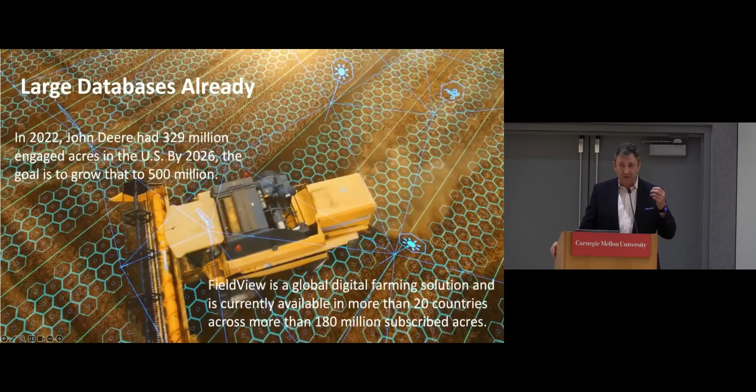So about data, why is this important? It's because data is not only important to actually develop trusted technology in terms of automation, but also because the data is going to be critical for your business case. It doesn't help to suggest that you can save some labor or apply fertilizers in a little bit better way if you don't have the data to back it up.

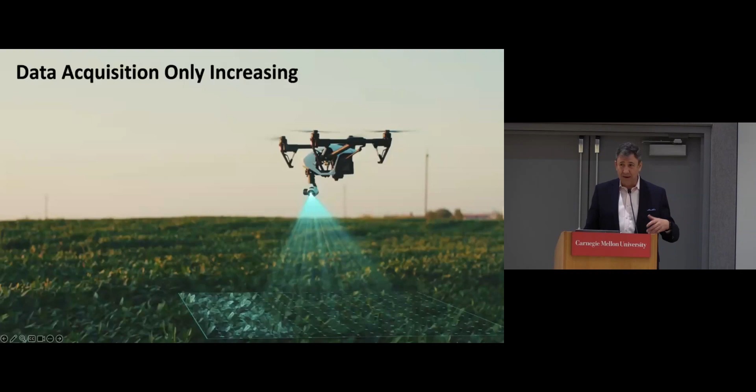So this is something that has been happening for the last 20 years, and the amount of area and data quality is very, very good to make the business case and also to run statistical models to understand how you can improve agricultural operations. And this data gathering is just increasing in terms of speed.

So that brings us to how farming and agriculture is managed. Same with mining, same with construction. It's not anymore based on only a few people who are knowledgeable. More and more it's managed by systems that analyze the data and with an industrial factory mentality are always working on continuous improvement and driving more productivity, more safety, more quality, and of course cost reduction.

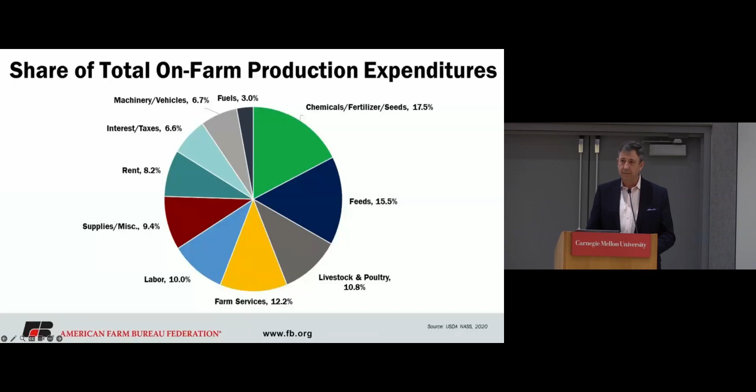So for example, when we look into what's the money that goes into a farm, and this is a very generic pie chart, you're going to see that labor is about 10%. So labor displacement is not really the main business for automation in agriculture. It's really about reducing the inputs, reducing the fertilizers, the seed input, the chemicals. And bringing robotics into agriculture is really about understanding that it's a production system.

Same as in a factory. So for that, understanding what are the stages and where automation makes the most business sense is critical.

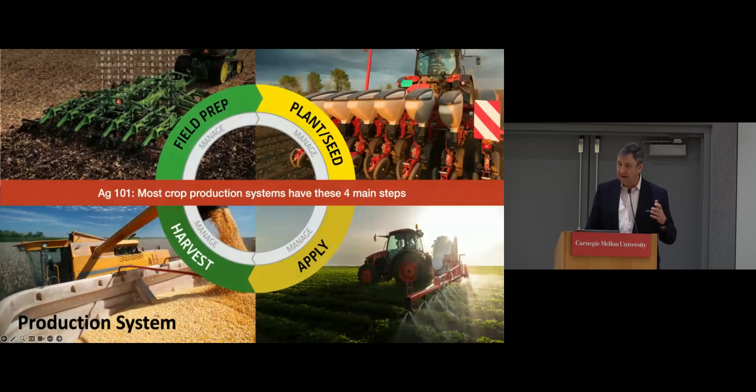So for example, here we have a tractor that is plowing, autonomous tractor. That's great, but that is just table stakes, the entry point. And John, thank you for this slide, I told you ahead that I was going to steal it.

Many a times, those of us working in the functionality focused on that orange step, which is the actual plowing. But a farmer needs to set up, plan, maybe he's planning from the previous year, setting all of the resources, adjusting things, integrating things, bringing the stuff to the field, and then at the end of the job there's also a number of tasks.

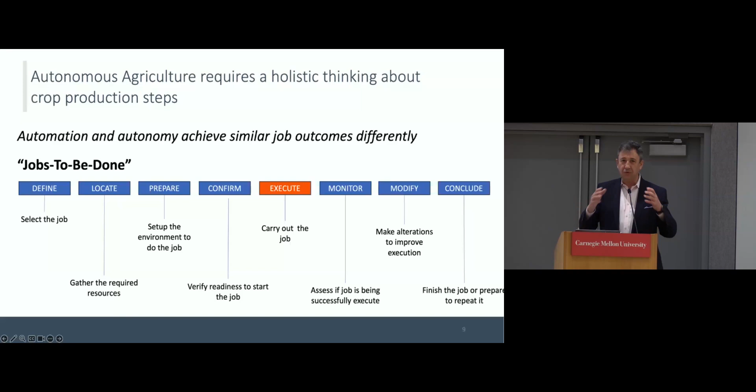So whoever is able to actually automate in the context of all of these tasks will drive the adoption. Also, going from A to B is not really the business case. The business case has to do with the job, and in the case of agriculture, it's an agronomic job.

A tractor by itself does nothing, and a robot by itself does nothing. But if you have the smart implements that are going to drive the actual activity and the engagement with the ground or the planting or the harvesting, that's where you create value.

And furthermore, when you think of the life cycle of the customer, you have the sales part, and there's a lot of effort into creating a product that customers would buy, but the customers will make the money using that technology over multiple seasons. And that goes back to the business case.

Because at the end of the day, when someone buys a tractor or an automated vehicle to do some job, the only thing that they have gotten when they buy it is a hole in their checking account for the amount of money they paid. They haven't gotten any value yet. Hopefully over multiple seasons, that value is going to come.

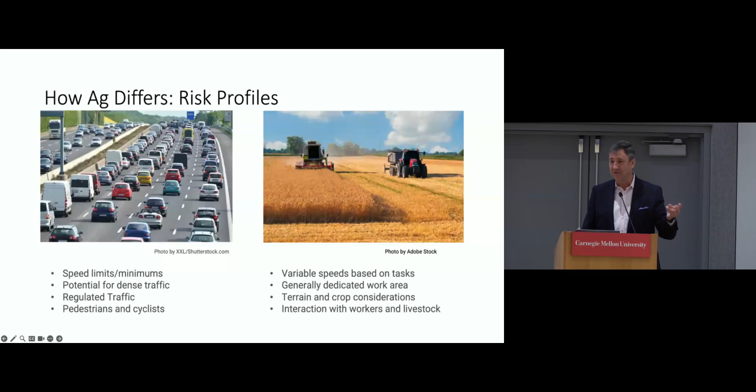But at the same time, crops are different, the weather is different, fields are different, and the globe is very, very diverse in agricultural operations. So there's another side of complexity.

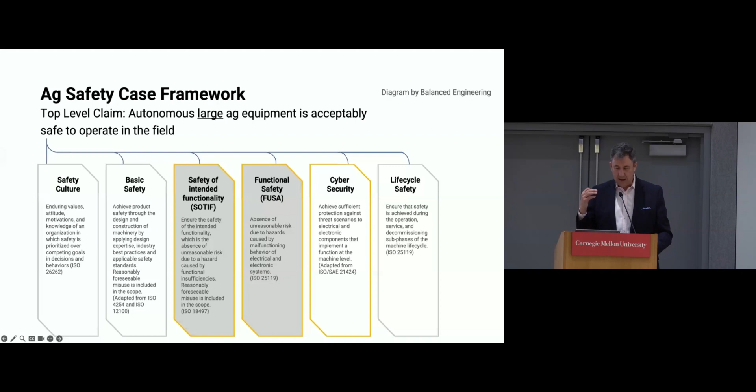You talk about SOTIF and functional safety. So some of us are putting a lot of effort and money to create dedicated safety cases for agricultural automation. I'm not going to go into the details, but of course some of this is inspired in automotive, but adapted correctly to agriculture.

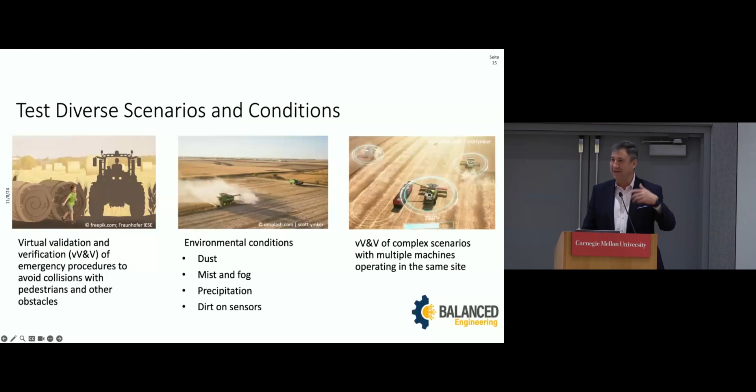Finally, the topic of simulation is key, and for some of us, getting to the level of fidelity of outdoor automation is really important to test all of these technologies. So I'm going to thank everyone who is working on simulation for DoD, because to some extent it's outdoor, it's all-terrain, and that works for agriculture and construction.

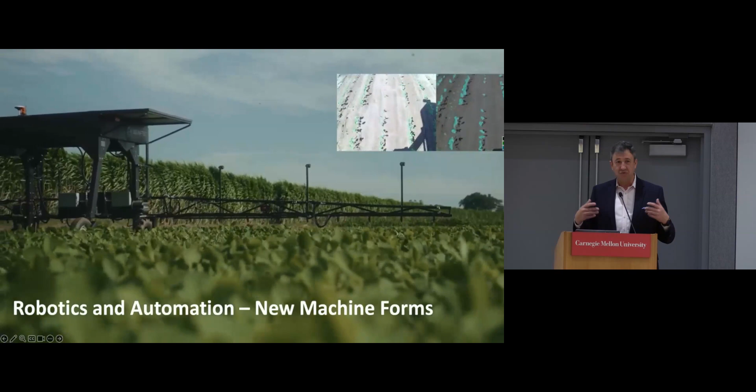Finally, this is just getting some new machine forms. It's not just about tractors being automated or sprayers being automated or trucks being automated. Also, it's about, well, what if we have a solar-powered robot that can run every day without any maintenance, without any tendering, without any fueling?

So this is one example of technology that is being deployed commercially by the hundreds in Canada, the US, and Brazil. With that, I'm going to stop talking because the most interesting part comes with John Reid, and then after that, Red.

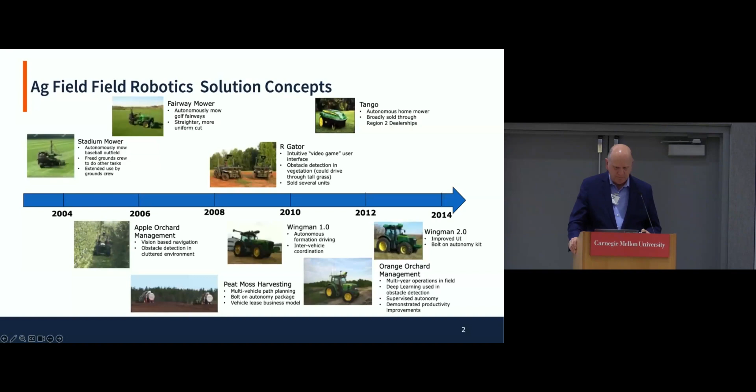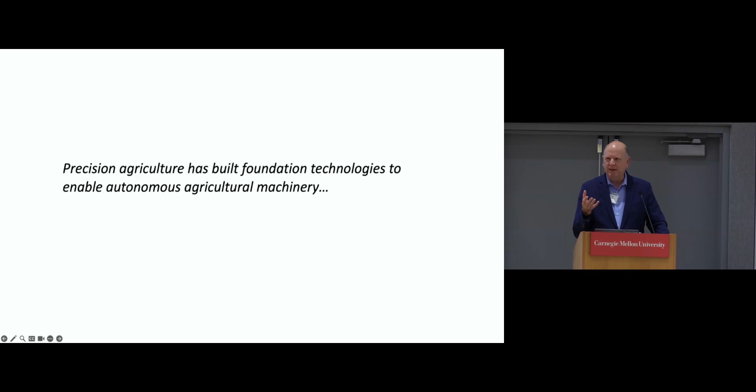What I really like about the application of field robotics to agriculture is that it actually has applications in precision agriculture too, and in fact benefits from a lot of the things that have happened in precision agriculture. With GPS technology, it creates a platform that enabled a lot of incremental steps to take place that lead to a wave of autonomy that's starting to happen in the industry today.

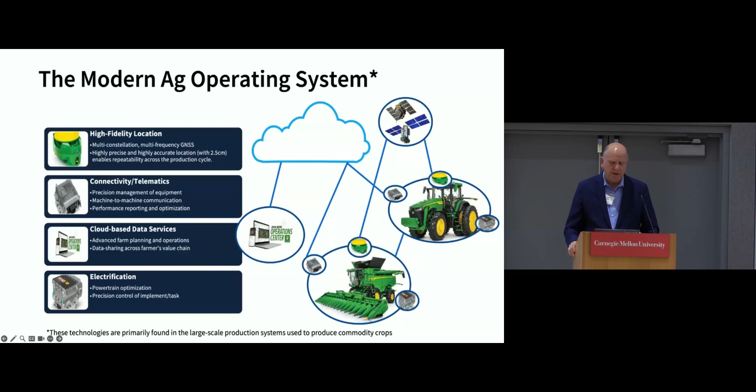You look back and think how far we've moved from the 90s, where you had to customize everything in order to do steering or brakes or anything. A lot of that is automation now. You have software-defined machines today. In the platforms we work with at the high end of the industry, we have high-fidelity location, connectivity and telematics, cloud-based data services, and electrification giving the ability to actuate parts of the machine. You probably never see battery electric, but having electrification for actuation really is an enabler for a lot of the automation taking place.

AI has actually moved into these systems as well all along this journey. My PhD work in the 80s was vision guidance using a PDP-11 strapped to the top of a tractor, with a very low pixel count - I think we just had 4-bit gray level pixels - essentially used for guiding a tractor down row crops. That's commercialized and on the market today.

Also, things like path planning and controlling the mission, even when an operator is on board, are available - not fully autonomous, but it really has enabled productivity, being able to reduce the skill level of labor required.

Automation and autonomy and AI is augmenting human performance as well, and this is an NREC product that Deere has on the market. It basically allows machines to work in close proximity while you're managing the fill. You can just see the stress go out of the operator's face when he's driving the combine and working, not focusing on whether he's going to run into the machine system adjacent to him.

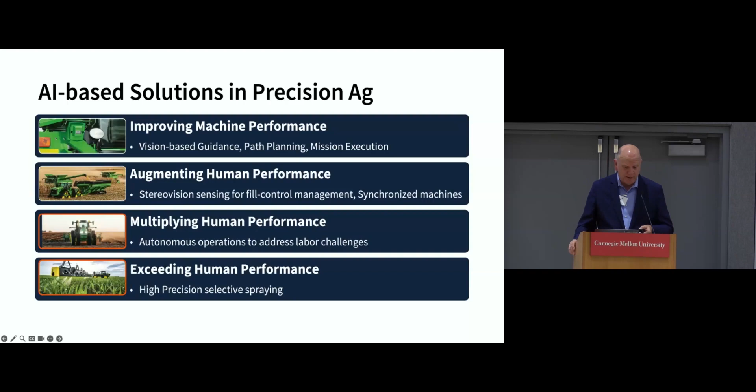We're starting to see a wave of companies trying to get the multiplication effect of human performance through autonomy, and I'll spend a little more time talking about that. I think it's really interesting to see See and Spray, which is precision spraying that reduces chemical use, but humans can't do that job on the implement. It's opened the door to levels of automation that still engage the operator on the machine, but help the machine do things humans can't do at the speed the machine is doing it - all providing value for the farmers.

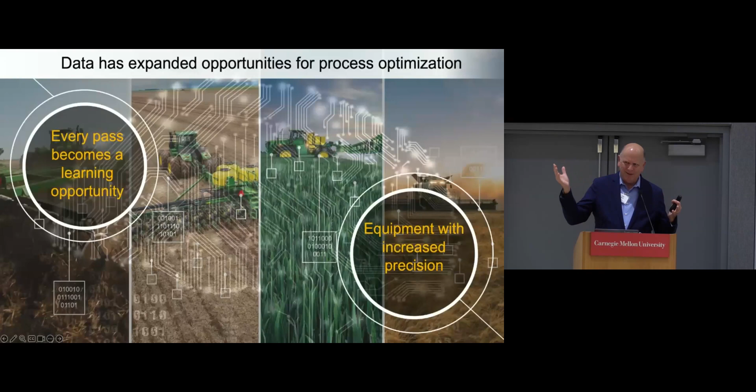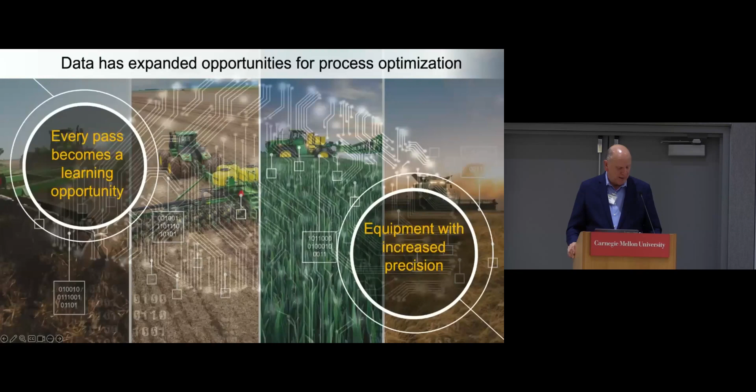Several people have mentioned this data side, and the journey we went on started with GPS, and data came in the last decade, being able to really leverage it. Data is the fuel that's driving a lot of this automation, because if we can measure it, we can see opportunities to make things better, and the data also can be used to take complexity out of the robotic systems. I think it's actually opened the door for field robotics to expand even further.

So here's an example of where the possible future state can go, because we sit here wanting to do robotics, and in our mind it's well, when will everything be roboticized in agriculture? Actually, I think there's going to be this mixed pathway along the journey.

One pathway is keeping the human in the loop, but the machine is getting more and more intelligent, with robotics capabilities integrated into the machine beyond the driving, even assisted driving. But the human is there to deal with the fact that there's a lot of uncertainty in agriculture, and safety in particular is a complicated task for all the different conditions around the world.

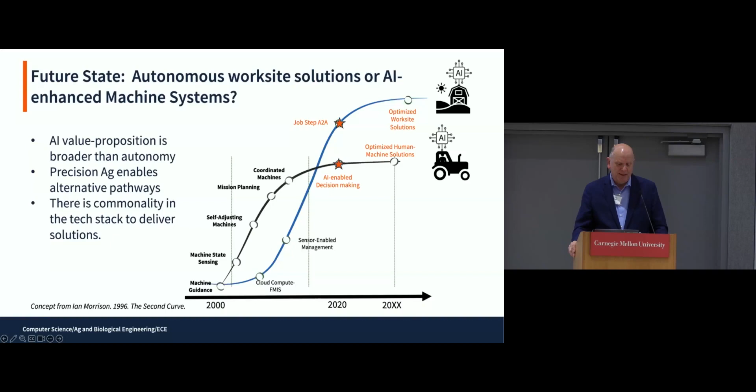But there's this other pathway that's thinking about the farming system and creating the job outcomes at the work site level. In this type of world, the autonomy is enabling solutions that can be more fully automated. Thinking in that work site context, there's a lot of job steps to be done too. I really believe both of these are playing out in production agriculture, and there's a lot of commonality between the technologies on both sides of this.

The other thing with the tech stack coming from precision agriculture is that it's also opened the door for transformation beyond this human-driven machine side that's been the predominant model in agriculture. When we think about this, we're all kind of taking existing vehicles, sometimes retrofitting them, like big tractors, to make them autonomous.

But with all of this tech stack in place today, there's no reason why the machine form has to stay the same. In fact, it may be an opportunity to leverage these novel machine forms, like Alex just showed in the slide, that can achieve the job. It's lower cost, maybe lighter, can operate day and night, and all of those types of benefits.

Especially, in our mind, we have to get beyond the part of the business model where the farmer is going to want to run these machines. Actually, the service models that were talked about earlier would apply to agriculture as well, and could open the door to really an acceleration of this transformation.

In fact, I think that helps deal with the complexity of the dealership Alex talked about. The dealer also has to have new skills to manage these machines, to keep them up to date. So actually a service-based organization has more of an opportunity to deal with those challenges.

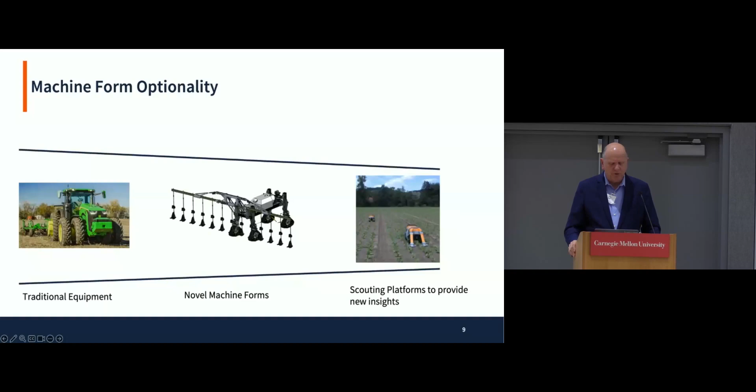I think it's, though, not the solution for large-scale production agriculture and field robotics. It might work for greenhouses and things like that where you have a more limited environment.

So others have talked earlier about the challenges with perception, and it's always been kind of the big gap for agriculture — lots of times trying to just take off-the-shelf technologies and leverage and use them. But over time, there's been technologies that have emerged that help do some things.

Active fill control was the perception sensor using stereo that's monitoring the wagon and trying to understand how to position it relative to a combine so it can fill. And then actually more recently, situational awareness types of applications.

These first two are kind of like doing a function and not really so much robotics, but taking those technologies and putting enough of these sensors around a tractor so that you can actually have an awareness of the environment so that it can be operated autonomously — that's doable today, and it actually combines the needs for autonomy with an ability to provide value, because these sensors also are telling the farmer something about the crop and the materials flowing into the machine that they can use to understand the agronomic impact of the technology.

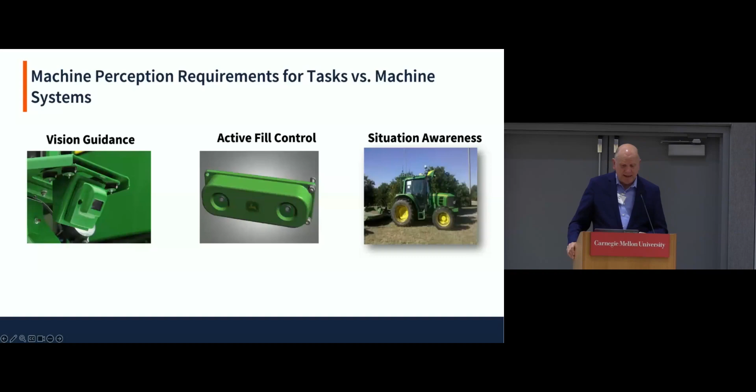The See and Spray is an interesting example. I talked about it doing things that a human would be challenged to do, but the other interesting part is that we're often so focused on the tractoring or driving of the machine that we haven't thought about the challenge of automating implements in agriculture. In fact, one of the bigger challenges is that the implement often isn't made by the tractor manufacturer, and farmers use multiples. So we're starting to see people thinking about more intelligent implements. I believe not enough energy has been put into this space, and it's going to be an enabler for future autonomous systems, because you have to have those implements.

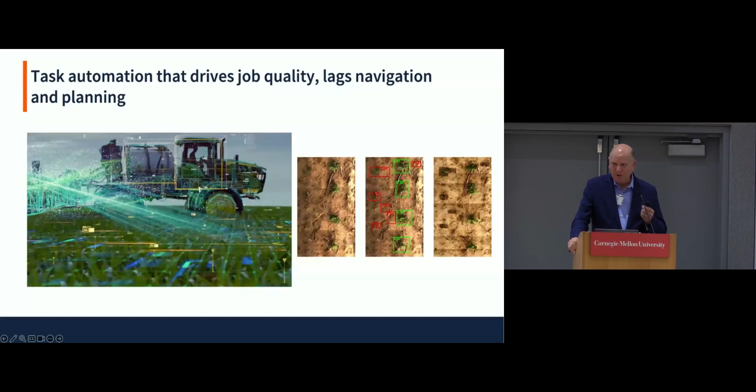I won't go over this slide in detail, but this was one of my learnings when looking across those different applications I showed earlier. The ones that tended to pencil out best were looked at from a work site level, where you understood all the job steps, how labor is displaced or utilized, and how the entire job gets done. It isn't just the video of running through the field doing the task, there's a lot required to set that up. So it's important that we think about this.

While there's a lot of applications in agriculture, somebody asked what will we do next. With all the technology that's been developed, we're seeing only examples of one job step being automated today. If you think about all the different steps Alex had on his slide, we're going to have to do all of those eventually. So there's lots of opportunities still.

I like this slide, this paper - there's a reference at the bottom from Thomson. It talks about this journey of automation to autonomy and its relationship to technology and other factors. The takeaway is that we often get focused on developing a technology and finding the application that will be successful. This paper talks about companies that adopted automation, moving towards autonomy, and it was actually a combination of factors, especially the business model side, that had to be brought in.

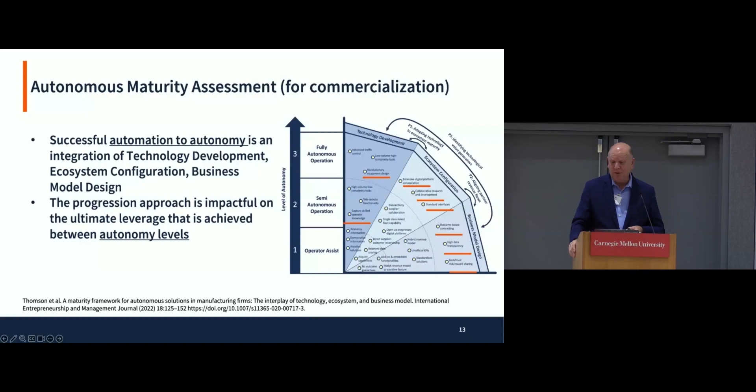And then on the ecosystem side, there are lots of new services in agriculture that will be required as autonomous systems emerge to replace traditional services. All of that usually has to come into play for the complete system to be effective.

The really interesting thing with the business model is that making machines more productive is one aspect, but the worksite is another. I think the S-curves I showed earlier are really in two spaces: one is that my advanced vehicle solution, robotics or intelligent machine, works to help me get the job done, and the farmer appreciates what it can do. Or, if it's remotely managed and autonomous, my machine solution does the job for me in a way that helps me run my business. Both of those are in play today in agriculture.

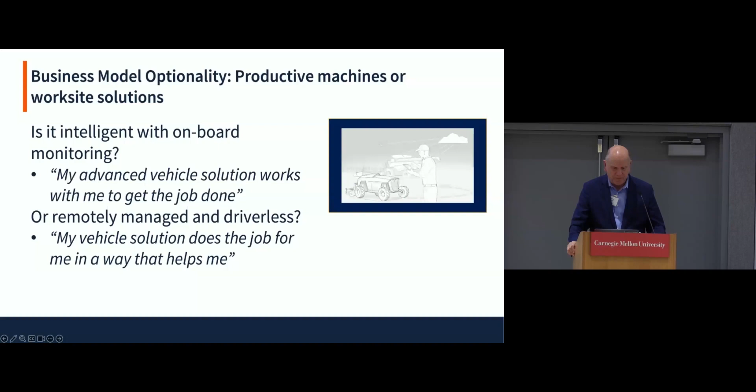So in summary, precision ag has been successful over the last 30 years. Autonomy is really just now starting - you see lots of different companies emerging taking this on. It's still kind of at the beginning of its journey though, because they're doing individual job steps. A lot of times we're going to have to figure out how to get beyond that to multiple job steps being put together, and those will be the successful solutions for the future. It's more than just integration of technology development.

It requires thinking about the ecosystem and the business model, and if you focus only on the technology, then you're limiting yourself to understanding these other things. There's broader system requirements that are really important. And finally, autonomy creates opportunities to transform the business model for the off-road equipment industry.

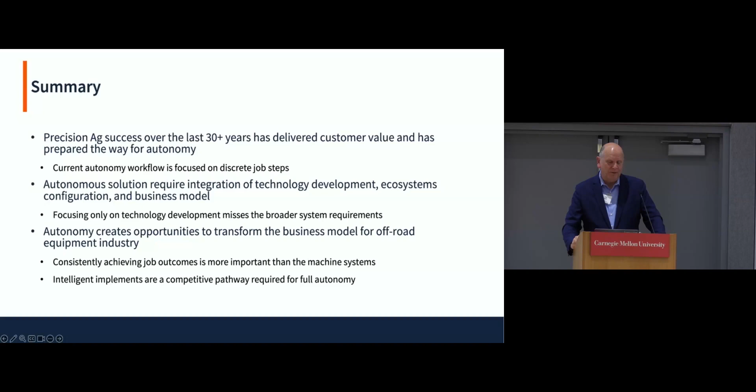Getting these job outcomes consistently is going to be the most important part of this. The industry, unfortunately, is still very embedded in their machine systems. But actually, the autonomy stack on top of that is opening the door for broader capabilities that go beyond just the machines. And finally, the intelligent implement side has been underserved, and I think it's an opportunity to accelerate autonomy by getting the implements that will work effectively once the machine is fully autonomous.

If I can just quickly, everybody showed a video, but Stuart's here, and we did do a project with Deere and CMU with Chris Dima and others. I can't remember if Carl Wellington was on this project or not. He may have already moved on. But it was autonomous worksite management in an orchard.

This U.S. Sugar was the orchard down in Florida. They basically already had robotics all over their orange juice factories, and they wanted to know why can't we have this in the field to get the same productivity. So this was a system where it was displacing drivers by having a kind of security guard manager running multiple machines. It was an example of where we put this in the hand of an operator. It had to be a special person hired for this job. And this was pre the communication infrastructure that we have today, so installing that infrastructure was really a critical part to make this problem successful.

The key points about why this is valuable: one, with the human operators, they do what they do, but you don't actually know what they do until you have the data. So one way to get improvements over them was optimized path planning. You had to have technologies like perception and localization to detect obstacles. Turns out this was a dangerous application too, because you couldn't go in the orchard 48 hours after spraying. So the driver probably didn't care if they weren't sitting in the orchard spraying these dangerous chemicals, because they were safer. And then we could have one vehicle or multiple vehicles controlled by one operator.

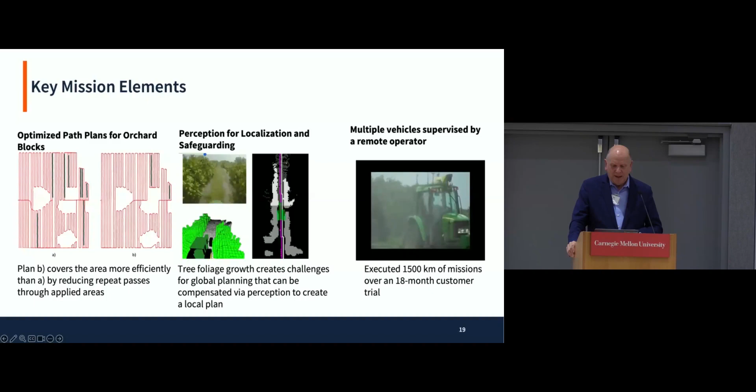As you can see here, there's the turning at the end of the row, autonomously driving. You see a lot of sensors bolted onto this that can be much better integrated today in terms of a clean appearance, but very, very capable at the time for the job it was doing. And here's a second tractor that's pulling a mower coming behind it.

So we had extensive missions with this type of system, and I think a really important part of this is that this system still had a lot of problems. It had a lot of false positives. It would stop frequently. The supervisor had to look around the vehicle remotely through cameras and decide whether there was a real problem, and then reinitiate the mission. But despite that, this system performed 30% more productive compared to the human operators that were operating these machines. So there's value there.

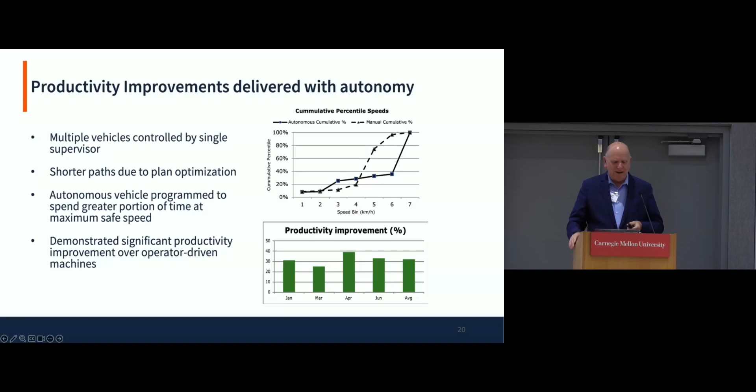They could reduce the amount of labor. It improved the job quality with a better job for the people to do, and it was more productive. One of the reasons it was more productive is that humans would drive slower through the trees, but it was safe to drive a little bit faster, and the autonomy would always drive 20% faster. So path planning and higher speed, being able to work day and night, a lot of those things provide value that customers really appreciated. Thank you.

Thinking machines at work in the world. This was the vision that we cast in the very early 80s, and it was encompassing pretty much all the work we saw today. So this would be farming, mining, construction, automotive, and of course, in our world, space.

And it encompassed the subjects of the talk, which included land, sea, air, underwater, underground, and by this time, space. And there wasn't a whisper of prospect for any fulfillment. The tech was absolutely not there. There was no sense that it would ever make its way into the world, given what it takes to break those barriers.

Or the better way to say it is to make the grade. There aren't any real barriers, you just keep plowing through them. And of course, fast forward, and consistent with the topic of the session, there's industry in every one of them. Some fledgling, some fulfilled, and so much more to come.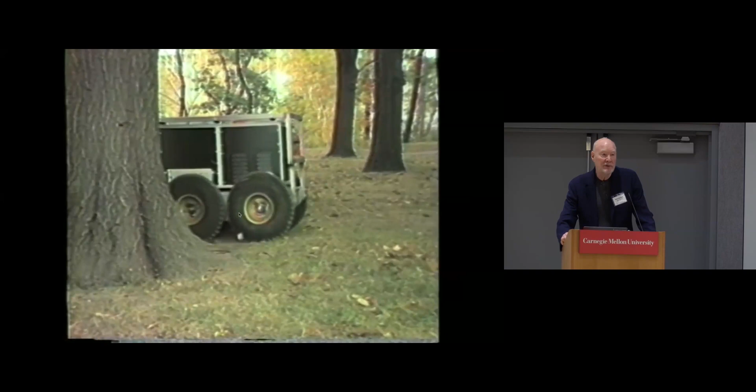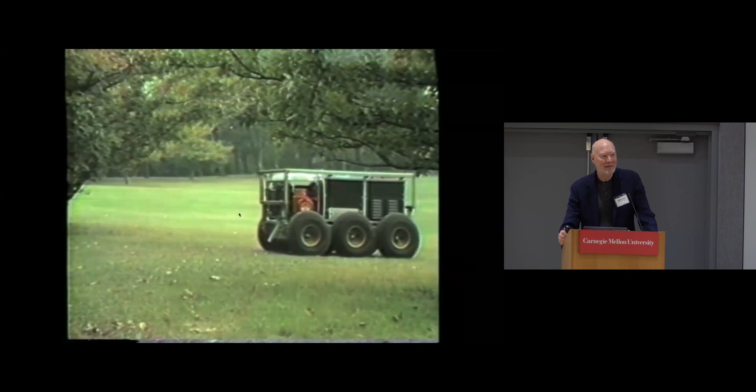So, of course, some things changed when this came rolling out behind the tree and across Schenley Park, and it was a new world. And it's just wonderful to be with everybody for a day, to look back at some of these origins and all the friendships it took to get us here.

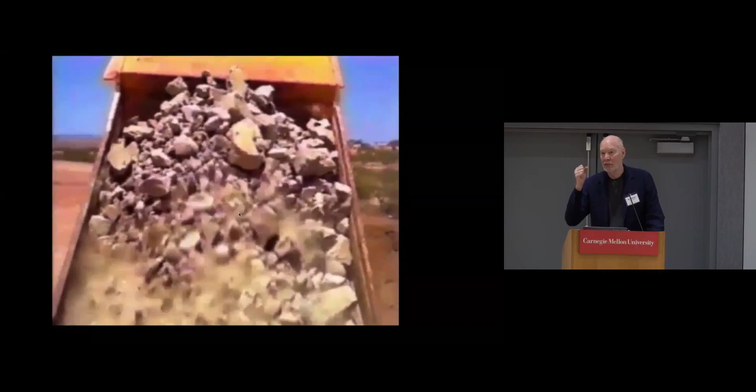And something to get in mining is that most of us sitting here wouldn't be aware of, is that all of our steel, all of our aluminum, all of our glass, every copper wire, all the electronics in our devices, all the lithium in our batteries, pretty much everything that people have or eat come from us with mining or farming.

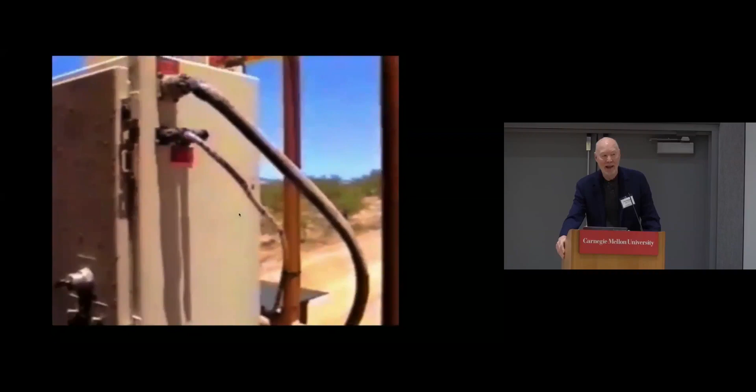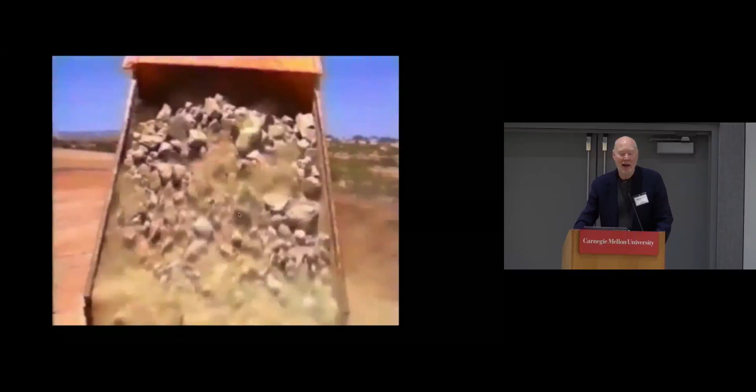Oh, by the way, what we're looking at here was, I'm going to say this might have been '91. So it would have been before, I couldn't keep the date straight, but there were some beautiful demos yesterday with buses, and those were on order of like '96, '97. And consider it was like five years before that.

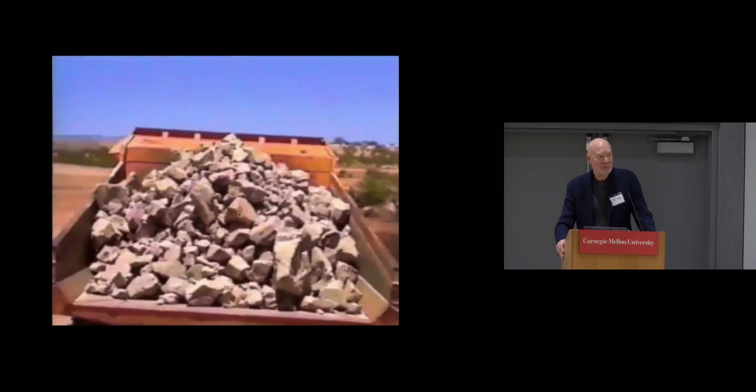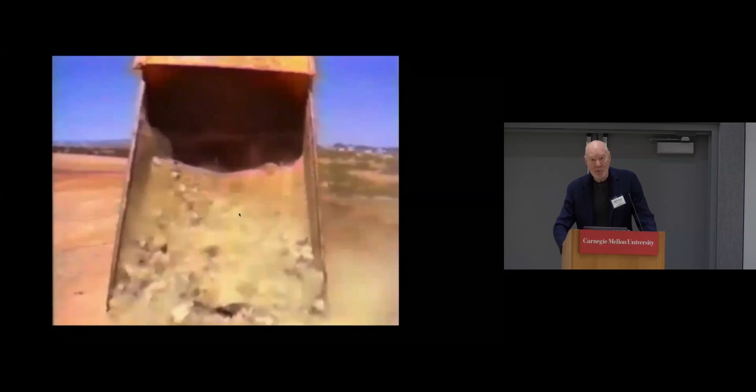And the other thing to get is that the commercial partner didn't think it up. We thought it up. We approached. We put the proposition out there and cast that vision that this is the one, this is your future. Of course, they'll always make better chassis, better engines, better paint job, better cabs. But

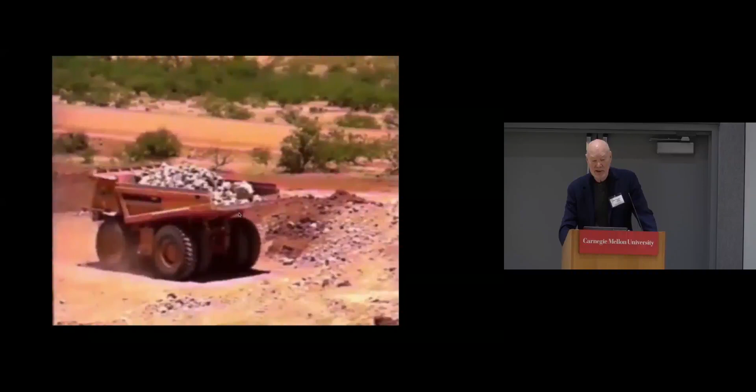this is the distinctive future. And we cooked it right here on campus, except, of course, for going to the proving grounds and living in the trailers and doing what it takes. And these are a dozen of those fundamental patents, fundamental in the sense that they are the foundation, and co-developed and then vectored to that partner.

And at the time, their business team, which we were pretty friendly with by that time, of course it was a closed meeting, but they viewed that those simple twelve patents were a billion dollars of value, in the sense that they were foundational and upon which it could be built.

I heard somebody said just within two days, told me that there are now over ten thousand patents by that company in the broad area of operational machines and digitization of mining and construction and other matters. Hard to believe, but good companies have a way of really doing it.

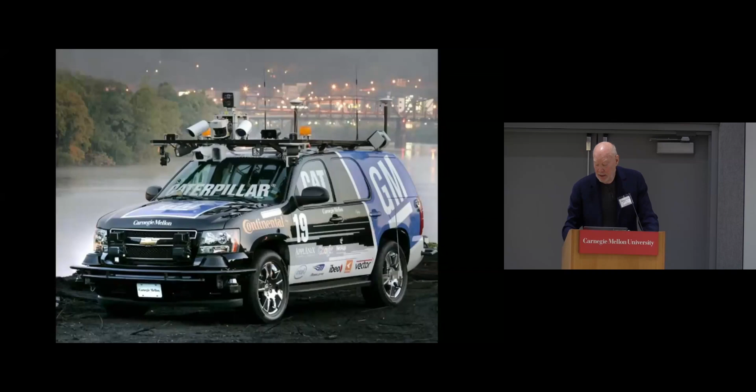And I think that the real effect of this kind of thing was, of course, to transform belief. People have said that here. But also a leap of technology. And to ignite industries. So chatting about industry, this ignited industries.

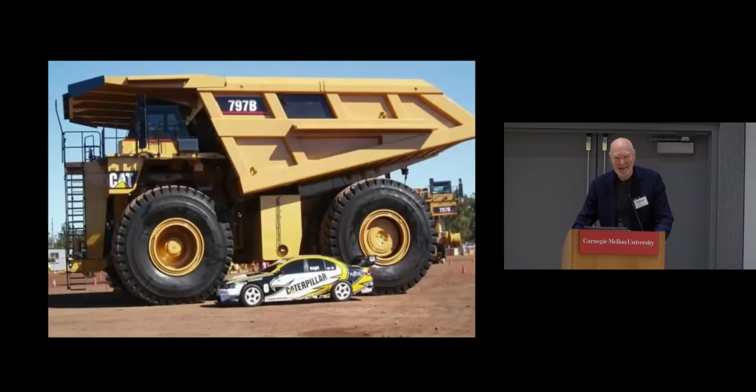And that led to the project also referenced. And so the point of it with that particular sponsor was to evolve from that code base the system that would ultimately do what we're looking at here.

And it's intriguing—let's say, well, maybe a couple thousand. Actually, they're less than 2,000. But right now, while we're sitting here, just that little fleet of trucks is driving autonomously, and I'm not talking a little autonomously. I think most people picked up that is level 5, depending on how you look at it.

But the distance that they're driving while we're sitting here is from the Earth to the moon. Another way of saying it is, well, that's a couple of trucks going maybe 2 million miles a week. I think the more important thing is that, as people point out, they aren't little.

And by the way, it's not little like that first one we did. That 777 might have been, I don't know—I do know, it's 226 tons. These are monstrous, and they carry north of 300 tons in load.

Besides, as we talked about real industrialization, having to make the business case. And of course, that does mean you've got a tech. It does mean you can reduce it to practice. It does mean that you got a market, but it does mean you better make the numbers.

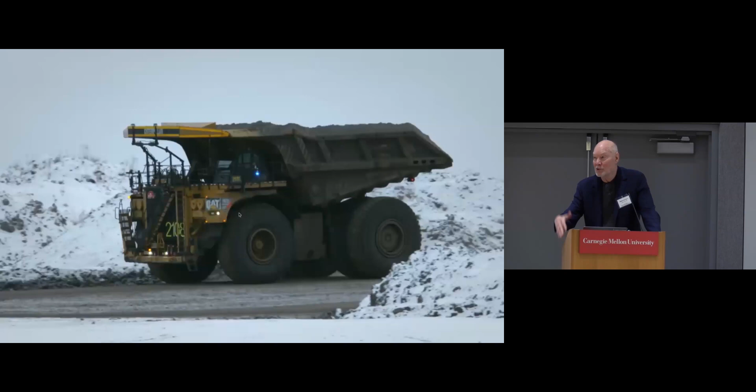I realize not everybody is like miner. My family was a miner. We're miners. I worked construction a long time. And there's no secret to anybody that I moonlight on my Carnegie Mellon job by being a real deal farmer for, I don't know, 4 decades now.

And I think in answer to Martial's great question this morning—what can a university do?—see something worth doing before its time and make it happen. So maybe another way to say it is: see the future and make that happen.

Anyway, so a ton of ore, they're not all the same. Some of that footage was in iron, and that's cheap ore. That might go $150 a ton, so one truck is only a third of that. You get into copper, that could go—I've seen it $9,000 a ton. Times 300 tons, that's a lot of millions in one load. So I'm not saying they're all going to be like that, but more and more, those are evident.

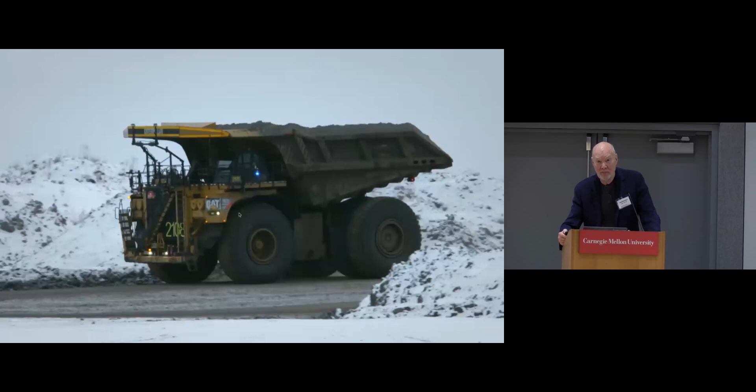Now, this was a long time coming. By the time this was coming, I had adopted some of my own equipment. I run about 400 acres of hay. We get about 3 cuttings here, so at round numbers, that's 1,000 acres. And with narrow equipment, it takes about a mile to get an acre. So that's 1,000 miles at maybe 3-4 miles an hour when you're mowing with the old stuff. And my point here is you got to go day and night for days.

And that's tough on top of the day job. Plenty of farmers do it. But consider what it was like to be masters of the trade that we had developed at that time, and see that there were these applications where almost was good enough, where you were out there dealing with traffic and all the safety—but I had to deal with safety because I wasn't there all the time. A lot of times I'd fire it up and come back to the city or go to Washington. And how I did that was I grazed cattle, and my fences around my big acres are electric.

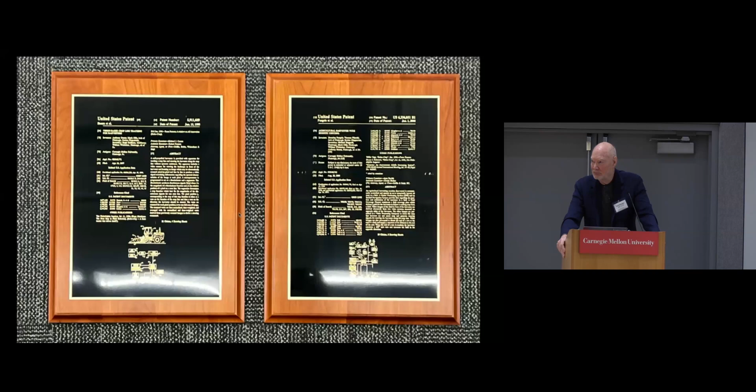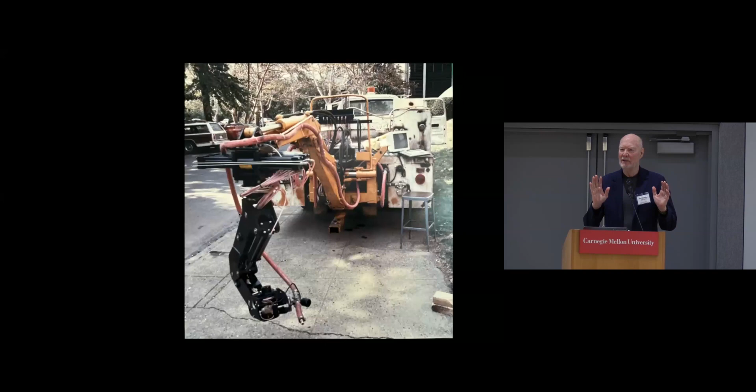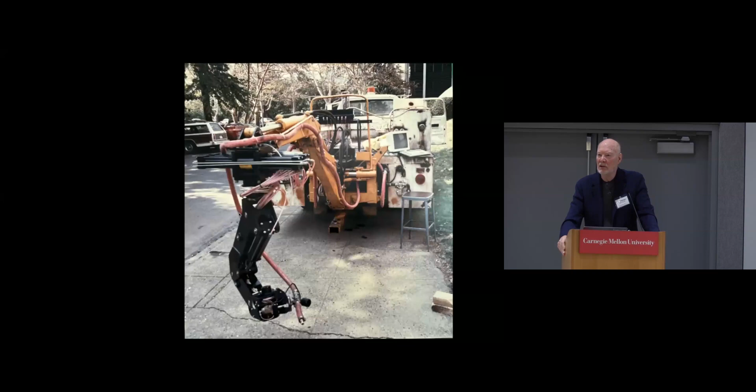I should say before this, we had very early contracts in manipulation of diffuse media. So this podium is a discrete thing. The earliest desktop robots were taking red blocks and putting them on blue blocks, on white blocks, or putting rings on sticks of object, object, object. Diffuse media is a natural world. Diffuse media is dirt. It's sand. It's planetary surface. It's mining ore. A different world. And we did the science.

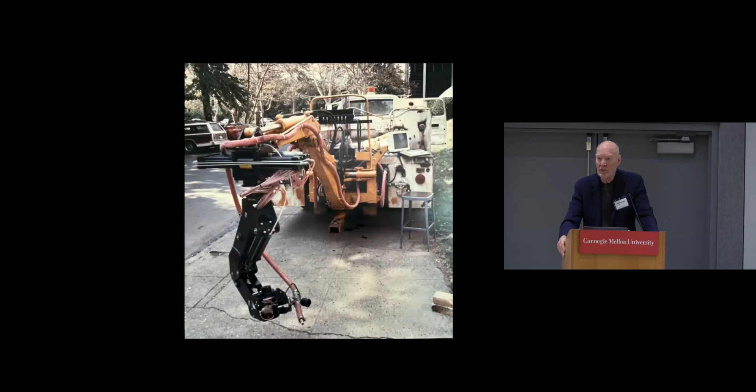And then this was an example where, I know you'd have to squint at the bottom, but there's actually a pipe. And we're doing it with the air because it's a leaking gas pipe. And if you hit steel on steel and making a spark in the gas, it causes explosion.

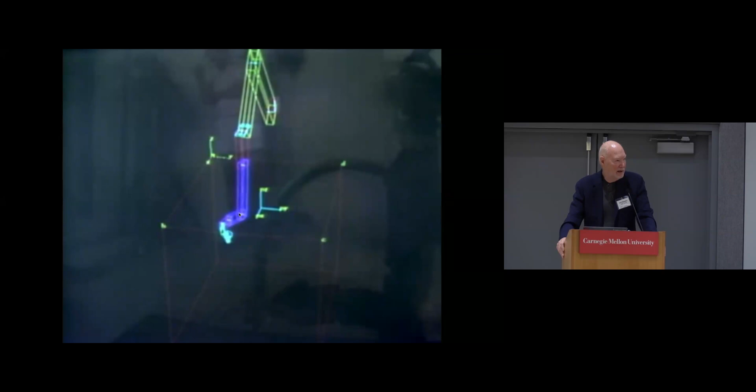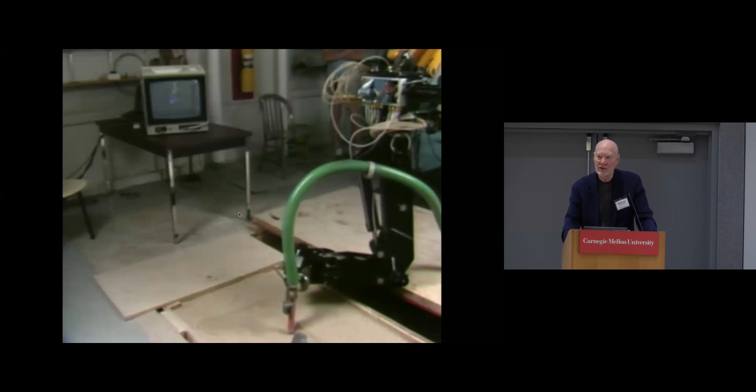And then the only reason I do the preliminary in the lab now, where we were using a vacuum to go after the pipe, is for a quick glimpse of the screen where it was stunning to get the forward and back solves sufficiently to implement the controls, such that this thing is touching itself along, or if it bumps into something it's touching directionally, and strategizing on that. So there's a tremendous amount of proprioceptive work and force work in these machines, distinct from just driving around.

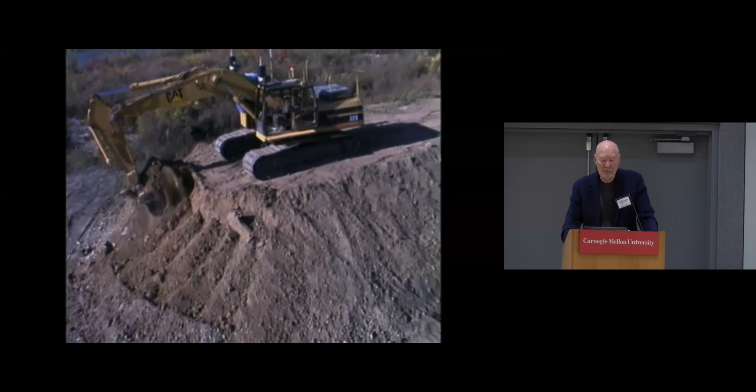Next step is pretty well known within our own sphere, maybe not as well in the outside world, stepping up in a big way. And, you know, I'd mentioned that particular company had been tracking us and had become good friends from way back in that first little excavation I showed.

And when we first approached with the grand vision and got down to the table talk, well, what are we going to do? So we really had them. And we leaned back, and there were two propositions. I wanted to dig. They wanted to, well, we could dig and we could drive. And they could see it. So I personally wanted to dig.

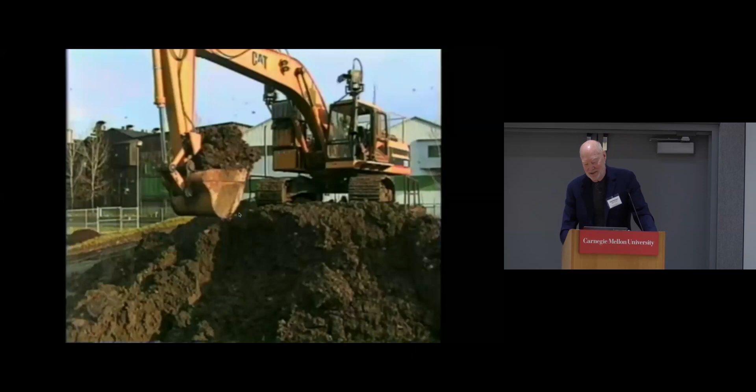And their mining department said, let's drive. And I said, let's dig. They said, let's drive. I said, let's dig. They said, let's drive. And that's what led to those trucks. But this was big.

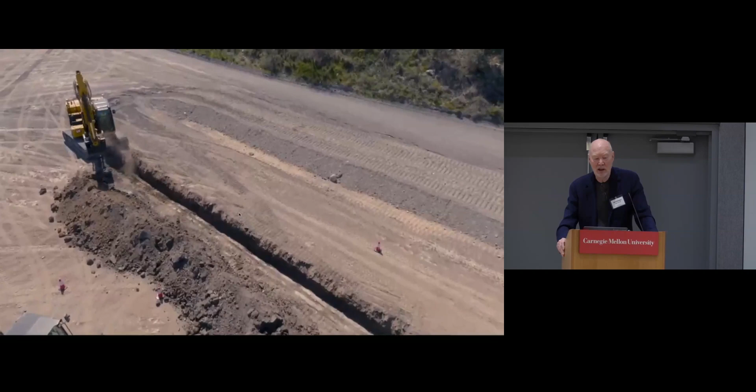And so a couple patents there, and here's how it's done today. Now, this is not exotic. This is just how it's done. Digital design that exists before the fact, the operations of the day embedded in the machine.

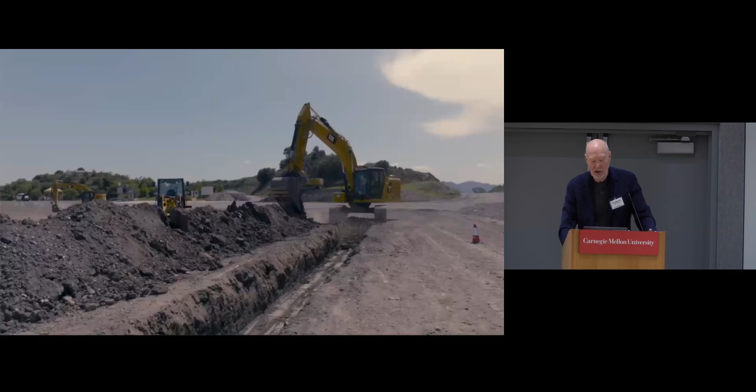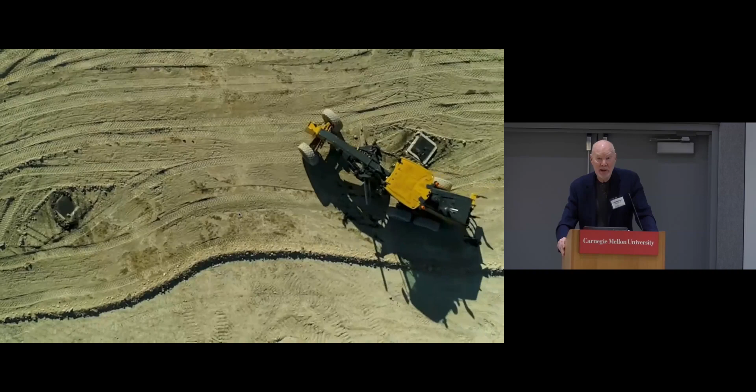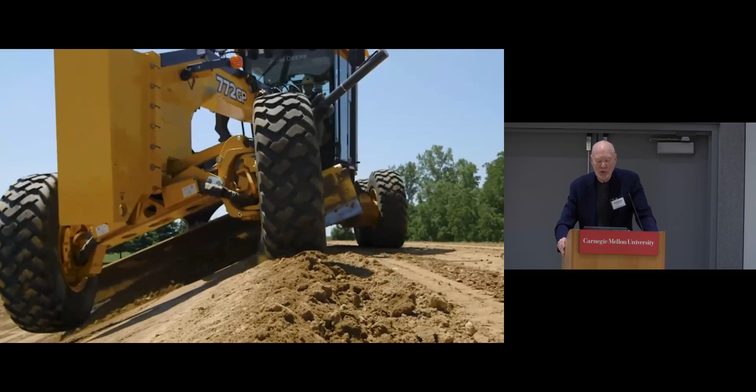It's common, like in the cars of the time, that there's an operator there, but so much different than having all of the things that operators used to do. This is a tough machine, one where I'm not very good on it, and I guarantee most people here would take 10 to 15 years to get this good. You can see, particularly in some of the angle shots, how much you have to see in order to really get the result of the design you want.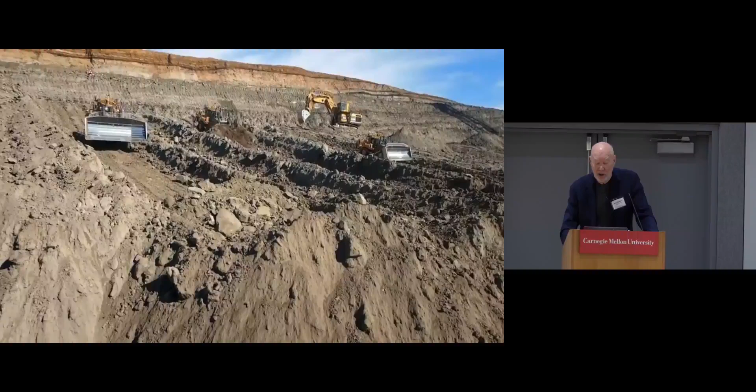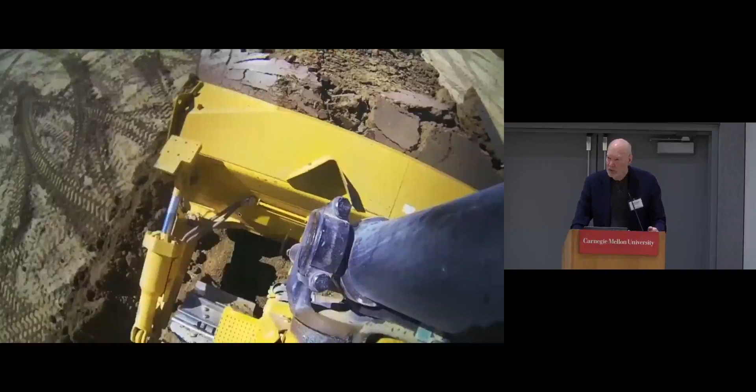So much of that, and so much of these big dozers, has evolved from the early work. I won't take the long story to go through it, but in terms of force, it's now automatic how you engage, how you fill a blade, how you carry that material a distance, and in the end how you drop it off, how it auto lifts, tilts, and gets back to where you started.

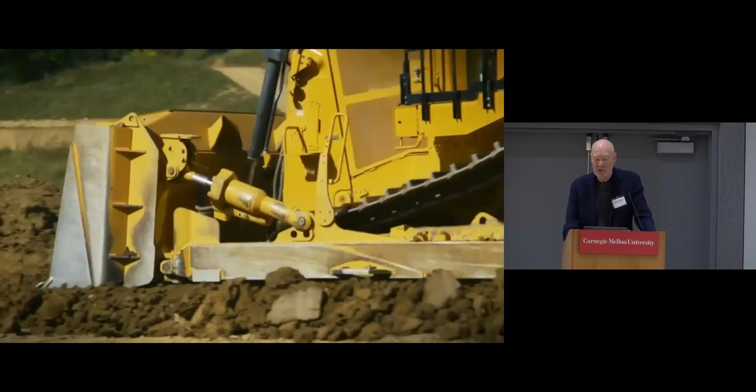Operator in a cab, usually, almost always, but the productivity—there's so many arguments for why it makes sense. I put this in for Marshall. I'm not even sure if he's still there. Well, here's the thing—it doesn't matter, I enjoy it.

And there you go, Larry's still here. So there was a time in that early going, and Larry showed some beautiful things in the can. Chuck talked about step, stop, look, think, step, stop, all that stuff.

So the Holy Grail was continuous motion of these planetary things, because a lot of them have a mechanical speed of maybe 5 centimeters a second, but their actual progress in terms of map speed is less, because they're not in continuous motion. This would have been around 1992, something like that, where it was self-contained, continuous motion—obviously not hardened for space, but in that context.

And then that became the basis for things like a robot that's on the far side. Not that it literally became that, but so much of the fundamentals presented yesterday became the basis for how these planetary rovers, of today and for all time, are going to operate.

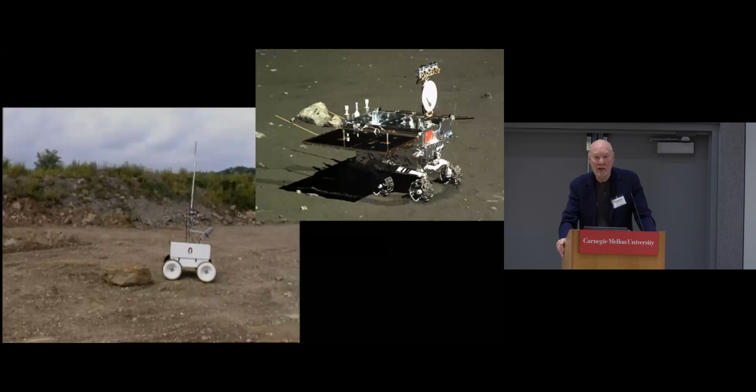I didn't put in a version of our own next one. I almost shed a tear when there was a Clint Kelly thing yesterday, and Clint mentioned this significant pursuit of lunar polar ice. The idea is that many view it to be the most valued resource in the solar system, because you can melt it and drink it, grow food with it, extract the oxygen to breathe, and put it back together to make rocket fuel. Our next rover, our next moon rover, will explore it to characterize it. So I didn't put that in here, but...

About the physical forms—the guys that paint it green have green ones, the guys that paint it red have red ones, and the guys that paint it yellow have yellow ones. There's a lot of this. And candidly, the cabs have a lot of glass, air conditioning, pedals, linkages, steering wheels, stereo—a lot of things we don't need, or that automation doesn't need so much. The name of the game in mining is dollars per ton mile. Carry as much as you can.

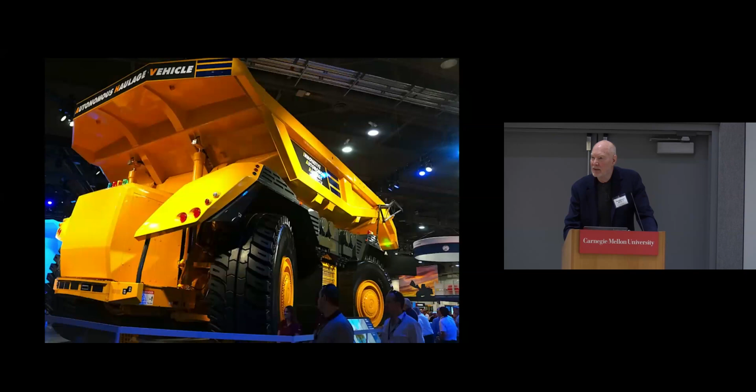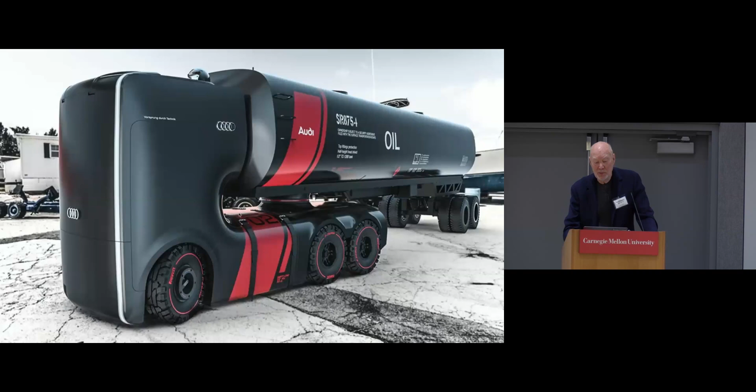These in trucking—new forms for the future. Yeah, who knows? Given what we've seen over the first four decades, it's always challenging to predict.

It's actually a pretty good run of it in these arenas other than cars and automotive that, in addition to our own vision, was actually encompassing. Many people talked about how cross-cutting a lot of these things are, and I couldn't believe how many people stood up here and said field robotics, including our current department head.

It's certainly in for the duration and has, and will continue to, dent the world. Everybody mattered, and that really sunk in here over the day or two. Industry means industry, and I personally always enjoyed the commercial partners for their capacities and what they could bring to the game as complement.

Innumerable spin-offs from ourselves, sponsors of course, but I think you get the idea—it's not just here's DARPA, here's NSF, here's DOT. A lot of sponsors that have mattered are the ones out there in the world.